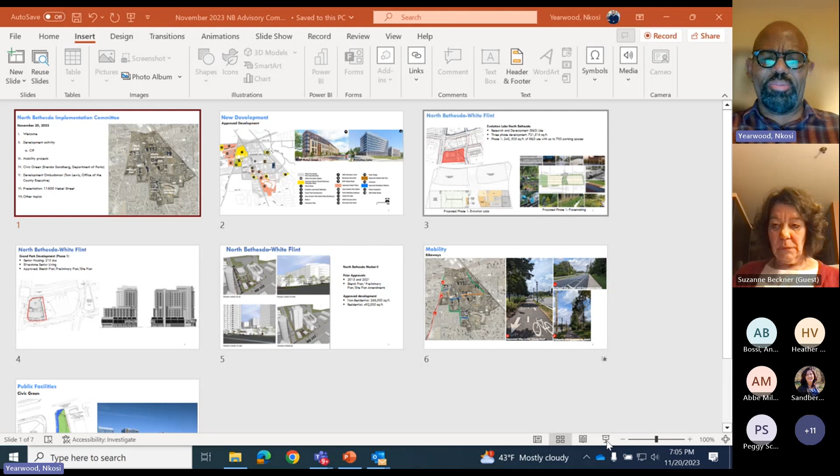I'll start with some development updates, things that have either been approved or are coming. In terms of the meeting agenda, a little bit on mobility, the bikeway project, an update from Brenda Sandberg with the Parks Department, and hopefully Tom Lewis if he's on this call. Then we'll wrap up with a presentation on a proposed project on Nebel.

So again, thanks everyone for joining. I'm going to get going here in terms of development - things the board has approved either prior to the summer break or since.

What's been approved - we anticipate construction beginning in '24 for number 9 on this map, which is MHP Nebel, a 162 unit multifamily development. Number 2 is Evolution Labs, which I have a couple more slides on - we talked about it before, you've seen a presentation in the past.

Construction should be starting next year for Grand Park Phase 1. Number 15 on this slide is Rose Village - we should be receiving, maybe before Christmas, a new plan from that developer/property owner, Wilco. Richard Cohen is the leader of that company, and it should be coming in under a compressed timeline given its focus on affordable housing. It has not yet been submitted officially to the department, but we know it's likely coming before Christmas.

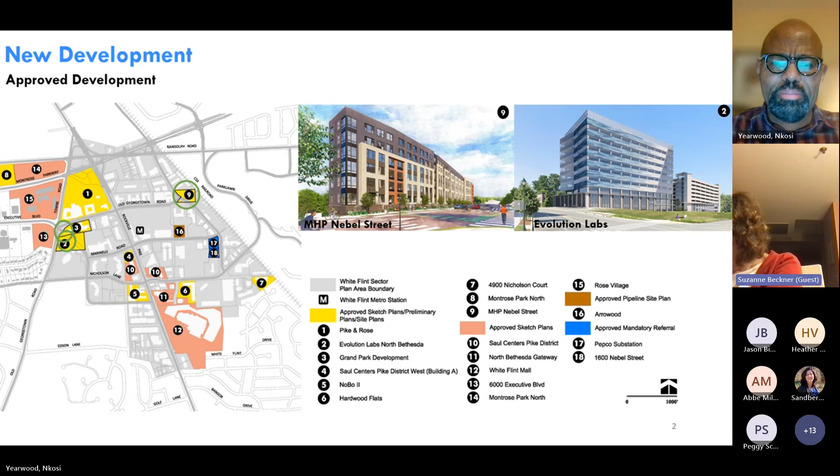So, does anyone have a question? When I finish this wrap up, you could either raise your hand or just unmute yourself.

This is Evolution Labs - a 3-phase project. First phase approval was granted by the board, but it has not yet gotten a staging allocation request. The staging allocation request is the final approval we grant for new development. Once that comes in, we'll really know the property owner/developer wants to move forward with building something. We have that for MHP Nebel as well as for Grand Park Phase 1.

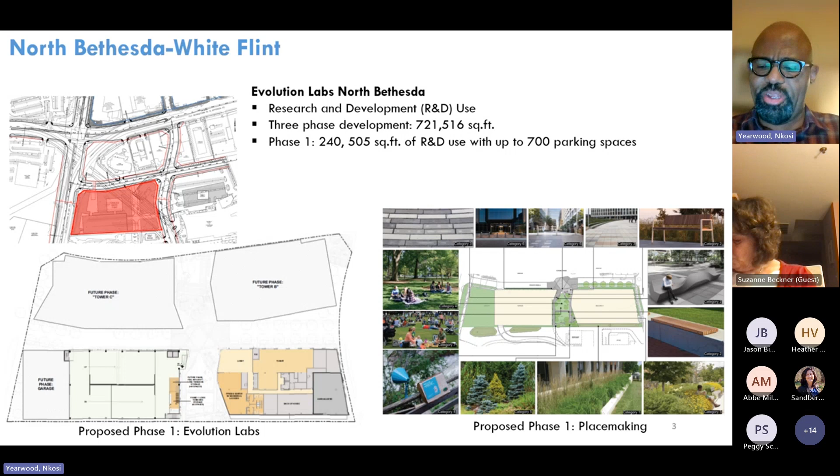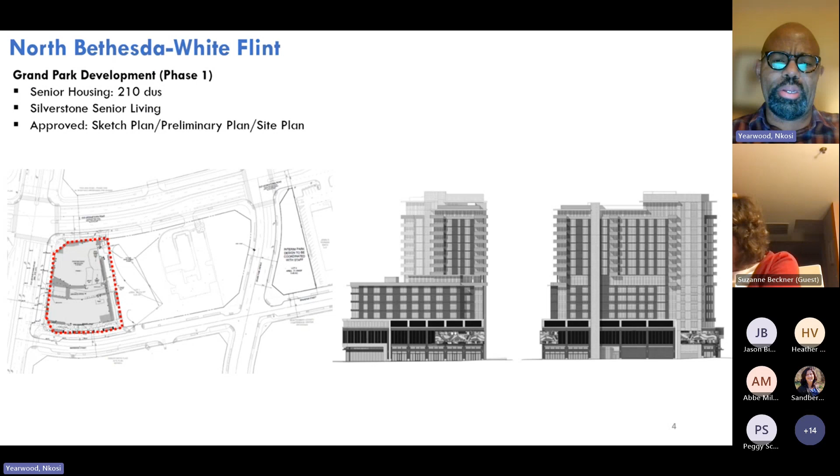This is Grand Park Phase 1 - senior living, Silverstone developer. Everything is being teed up for this to move forward. Wouldn't be surprised to see construction beginning in January '24. It's a senior high-rise development right across the street from Pike and Rose for orientation - this is where the VOB Saab dealership was for many years, right adjacent to Capital One, not too far from the conference center.

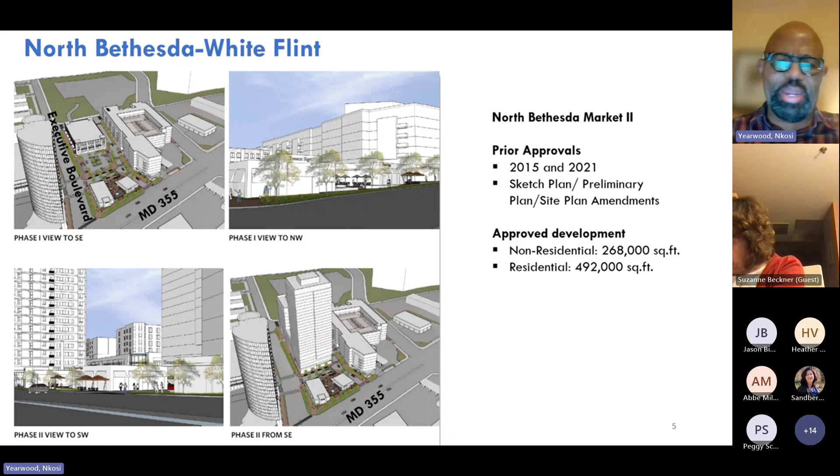Another one that's been approved prior, going around several cycles over several years, is North Bethesda Market 2, right near the Whole Foods, north of that, not including the gas station at 355 and Nicholson. It's a multi-phase project that will have multifamily, some retail, and eventually may build over the existing office on Woodglen with a China garden on the ground floor, for orientation purposes. We'll see if that gets going next year.

Switching a bit to mobility projects - over the last calendar year, a variety of projects have been implemented, some by the state, including the buffered bike lanes on Old Georgetown Road as part of the western workaround, the side path near Wall Local Park, and the protected bike lane along Towne Road fronting Pike and Rose. The next bikeway improvement should be up and running next year, maybe first quarter, a project that's been delayed for several months, probably more than a year - running close to 2 years by now - the Marinelli Road Bikeway project between Nebel and 355.

Once that's in place, another portion of the bikeway network will be implemented within the planned area. And then another important - let me just pause on this and switch topics for one second.

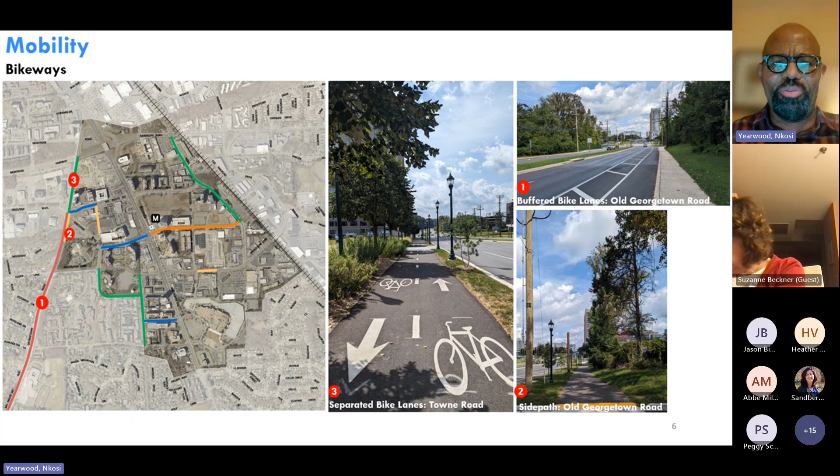Another facility we anticipate, not a bikeway facility but another public facility, is the fire station and some housing project associated with that - that's in the works. They're probably going to get a little more daylight in '24. We have a meeting coming up on planning staff calendars regarding that - not the fire station, but the housing component associated with it. This group will probably get more public-facing information on that next year.

This is my pivot to Brenda from the Parks Department. A couple weeks ago, the planning board authorized the purchase of the Jemal property on Old Georgetown Road, right across the street from Pike and Rose. It's part of the Grand Park development - we were able to get about half an acre from that developer, shown here on this slide as the green dot. The Parks Department went ahead and purchased that property after multiple negotiations with the property owner.

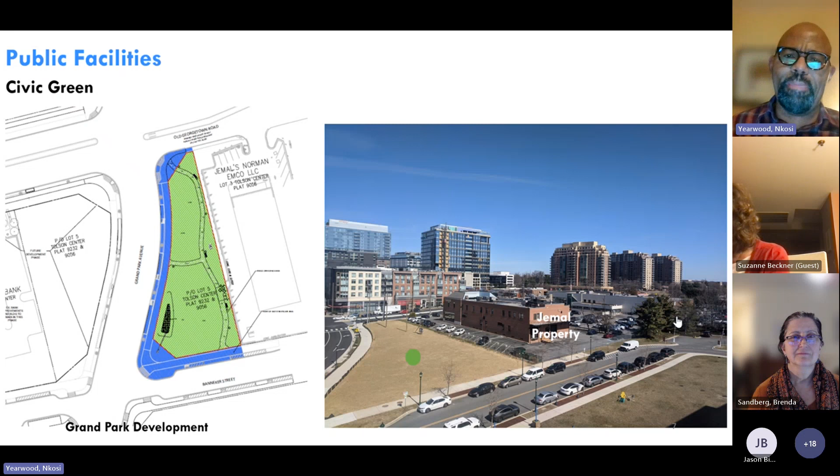So I'll stop talking now and ask if you have any questions on anything I've presented so far, and then ask Brenda, if she's here, to go next. Is there any questions for me? I don't see any hands raised.

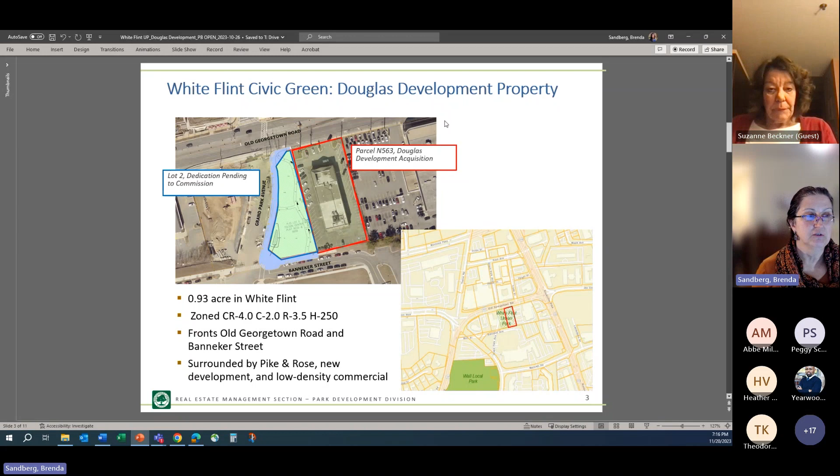You folks are very familiar with this area, so I'm sure you know it has Pike and Rose, new development, as well as some low density commercial that still exists in the area. Most of you probably know it's a 23,000 square foot building, built in 1969. It's in excellent condition, and it currently has 2 tenants: the piano store and a development company.

As we've mentioned in our public memo on the item, there's a very strong policy rationale, and we've been working to acquire this property for over 2 years. The 2022 PROS, the Park Recreation and Open Space Plan, is done every 5 years to meet state requirements, and outlines all parks policy and what we're doing and why. Then Thrive Montgomery focuses on active parks and open spaces for growing dense communities such as your community, the White Flint / North Bethesda area.

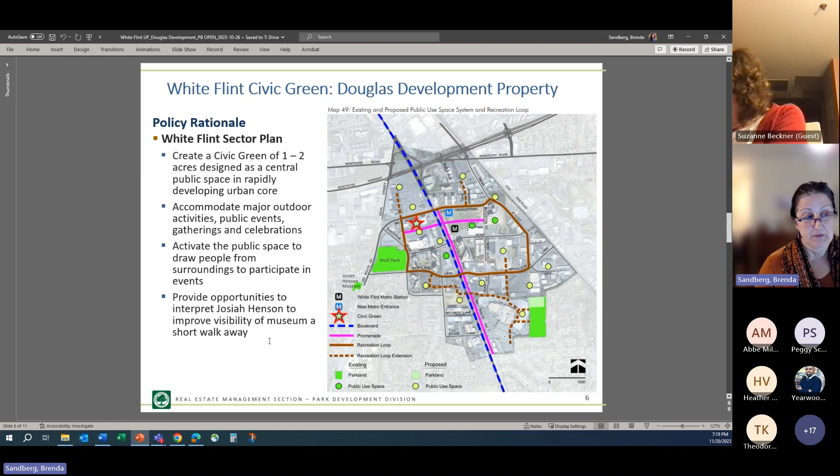As I mentioned, the vision is to create the civic green, 1 to 2 acres, to be a central public space. That is where we have acquired this property. The purpose of this park is to accommodate major outdoor activities, public events, gatherings, celebrations. The intent is to activate the public space, to draw people from the surrounding developments, both commercial and residential, to participate. Also, given its location pretty close, only a couple of blocks from Wall Park, which is another block from the Josiah Henson Museum, we think this is a great opportunity in this park to at least have some interpretation of Josiah Henson to help improve visibility of the museum just a short block away.

Again, you are familiar with what is going to happen here. What we negotiated with the developer, and is being fine-tuned as we speak through the park construction permit, is for the developer to build phase 1 of the Grand Park project to build an interim condition park that is designed so that along the edges here, it will easily integrate with the Douglas development property. The amenities for that interim condition will be open grass, paths, benches. So there will be a public open space that people can use until we get through the periods of time we'll have to get through to get to a full 1.5 acre park.

So we do not have a detailed park concept. After several years of negotiations, we just came to agreement on the amount and the contract about a couple of months ago, so a full-blown concept plan has not yet happened. There hasn't been time for that. But I'll mention when public outreach will start to get public input in the next slide.

Typically, the signature amenity for one of our civic greens is a large green lawn that can serve all sorts of purposes. It might have a stage, it might not. The goal is to have an abundance of seating, a mix of sun and shade, interactive and educational elements, public art, and amenities to support everyday use. So if somebody wants to get food to go from one of the restaurants across the street, they have a nice green place where they can throw down a blanket and have a picnic, toss a frisbee, do whatever they want. But it can also host really big public events that will help bring the community together.

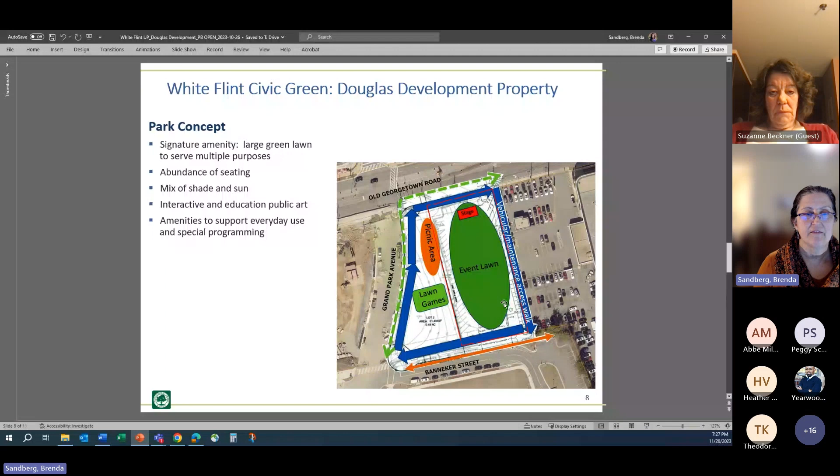Anyway, the planning board resolution isn't relevant here. I'll go back to the graphic, or I can just stop sharing the screen if everyone's familiar with the site, and I'm open for any questions.

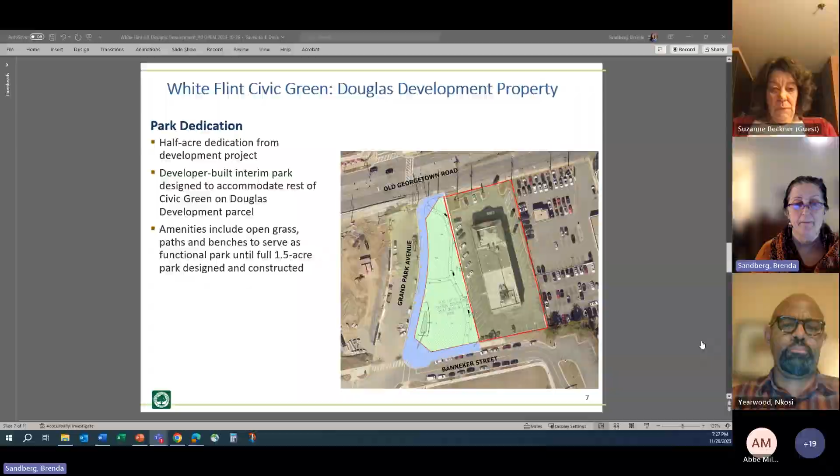Good evening, thank you for your presentation, Brenda, it was great. I have a question about something you mentioned regarding stormwater management at the site, and I was wondering how that is going to be implemented, integrated, and what the timeline is for something like that.

Well, stormwater—any project we build has to have stormwater management to meet the impervious surface runoff from whatever we're building. For instance, when I mentioned it, it was relevant to Lot 2, the piece of land being built as the interim park, which is almost half an acre.

There's a little area in that diagram—again, that was from an early site plan—there was a small area that was going to treat stormwater, I believe from the sidewalks, not from the road. It's not the park parcel's job to treat the storm management overall, but I believe it would treat some of the runoff from the sidewalks and side paths, etc.

In parks, there was a huge focus on doing bioretention and all sorts of other quality, more natural looking, as well as more natural functioning stormwater management. So it's not just channelizing it and running it off, it's integrating the stormwater management design into a park, so it feels green and attractive, not an ugly ditch. There's a huge amount of effort that goes into that.

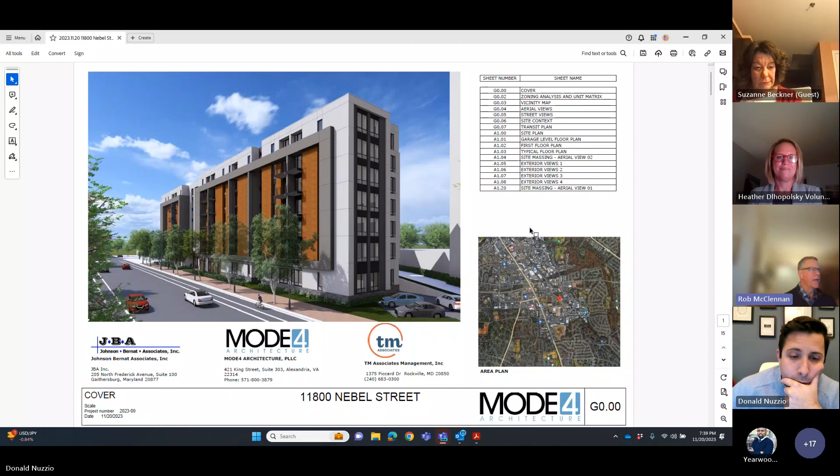We've given away the reveal here. Next slide. This is just a quick overview of the site. Next slide.

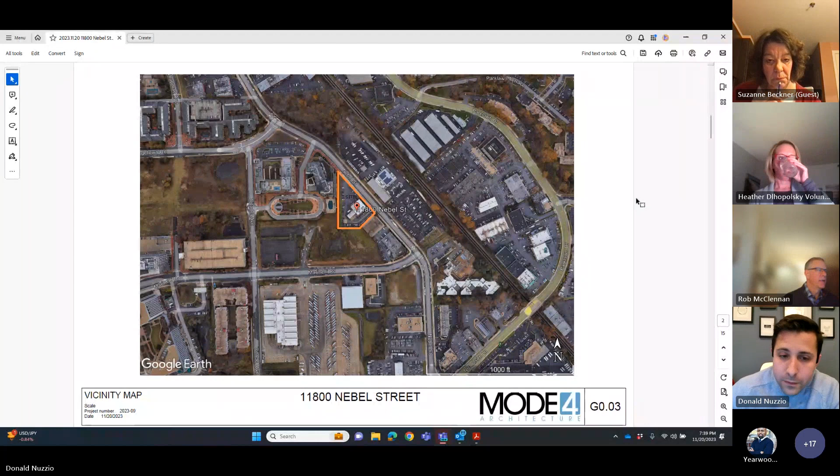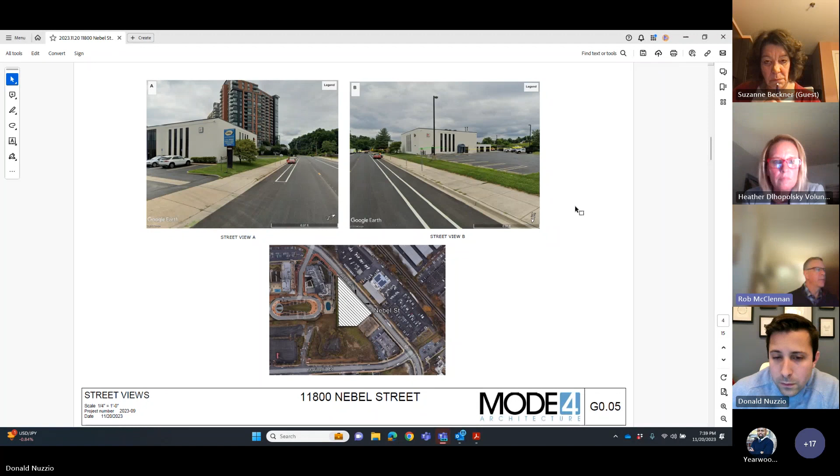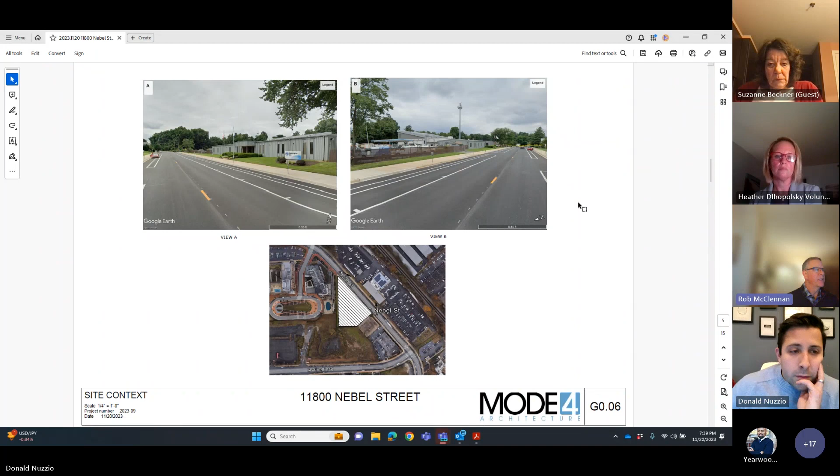Some aerial views as well, I think you're all familiar with the site. Next slide, Don. Some street views showing the existing building and the recent residential tower in the distance. This is looking north on Nebel Street, and looking across the street at the Washington Gas facility that's directly across from our site. Next slide.

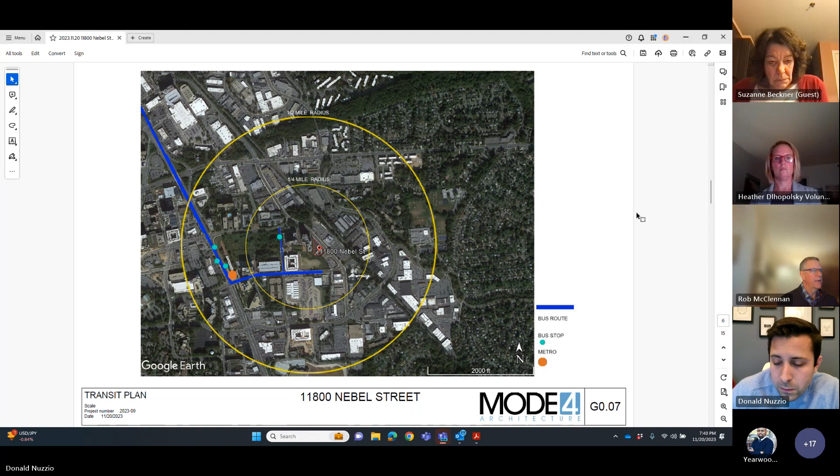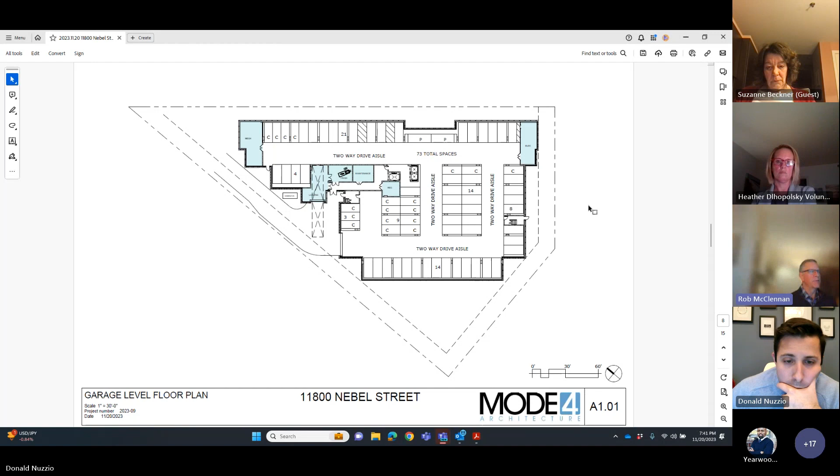Our ground floor is a mixture of amenity spaces and residential units, with 14 residential units on this floor. The amenities include a generous lobby, leasing office, a 750 square foot community room with an associated show kitchen, and bike storage leading directly out to Nebel Street to promote bike use.

There's also a raised area. You come into the lobby at ground level, then there's a raised area about 4 feet up containing a business center, what we call the living room—a lounge area for residents—and a fitness area.

The lounge area opens directly onto an amenity terrace above our garage, which connects to a triangular piece of land at the rear of the site. We'd program that with a tot lot and barbecue pit. We haven't finalized the landscape detail, but it's an amenity connecting inside and outside spaces.

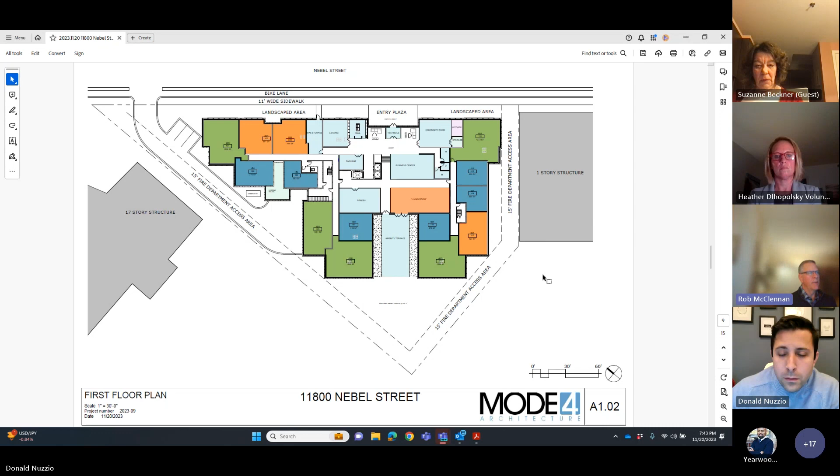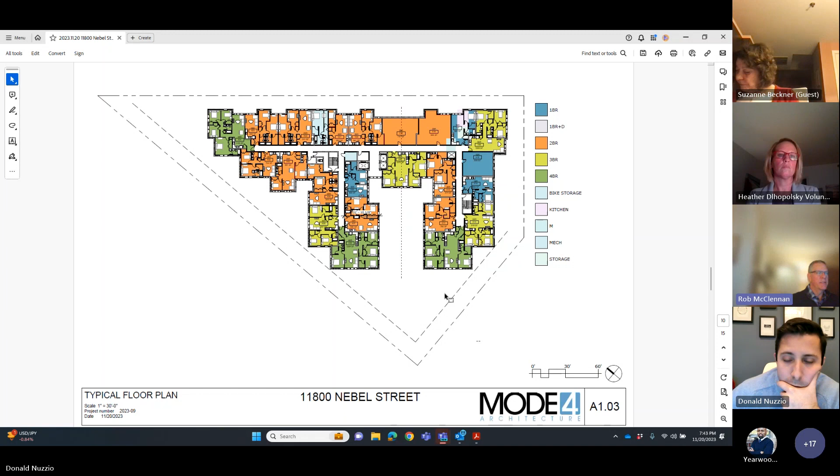This is a typical floor plan for floors 2 through 7, with 23 units per floor. We've color coded the units: a mix of 1, 2, 3, and 4 bedrooms. 20% are 1 bedroom, 49% are 2 bedroom, 15% are 3 bedroom, and 14% are 4 bedrooms—so there are a lot of family style units, especially the 3 and 4 bedrooms.

This is an overview image showing the building in relation to its context—you can see the 17-story building to the right, and our 7-story building in the foreground along Nebel Street.

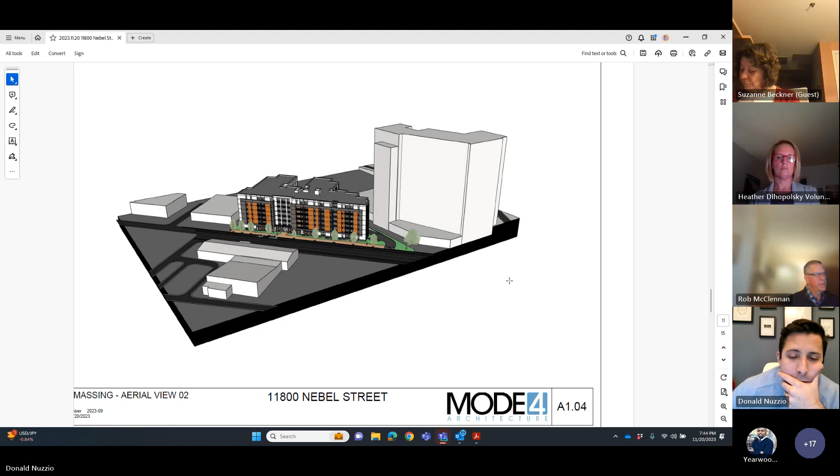These are some preliminary renderings. As mentioned, we're still in a concept phase, working through some color iterations, but the general idea is a 7-story building.

The ground floor would contain amenity spaces with storefront systems that activate Nebel Street. The units themselves would sit about 5 feet above the sidewalk to give privacy so people aren't looking directly into the unit, while still helping to activate the street.

Within the building, we're proposing a frame system, shown in gray, rising from the 2nd floor to the 6th floor, containing a panelized system with inset balconies and other windows. The 7th floor would be an attic story that cascades down at the ends of the building and at the entry.

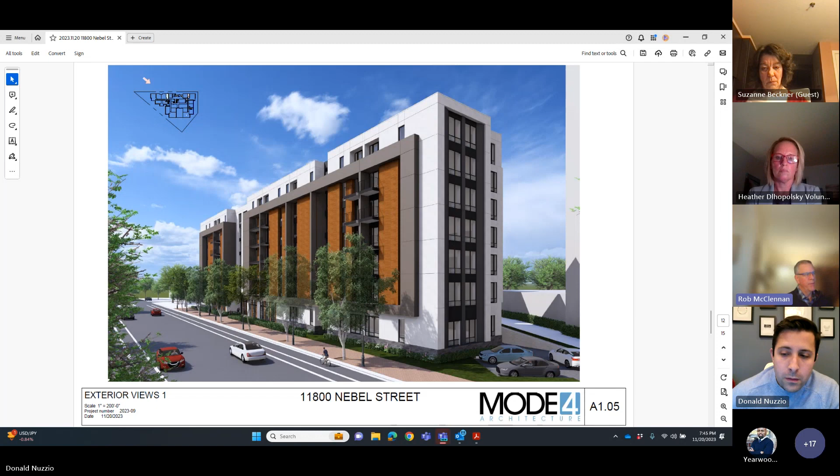This is the entry, which we're still working through. Based on comments from county staff, we plan to enlarge the paving area here and add benches for residents and guests to stop and wait for an Uber or similar. This would be the entry system to the building, and we do propose a canopy.

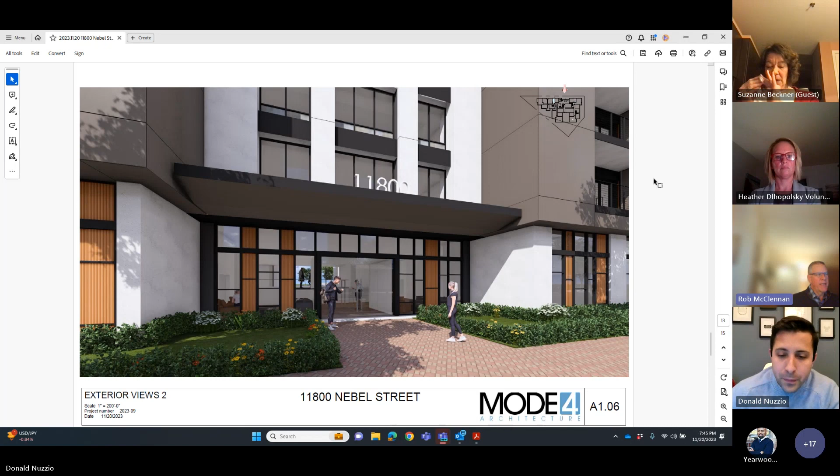Overall this is more looking toward the north. You can see the entry bay is recessed to allow for more landscaping in front of it. And then we create these 3 vertical window bays that add vertical accents to the entrance.

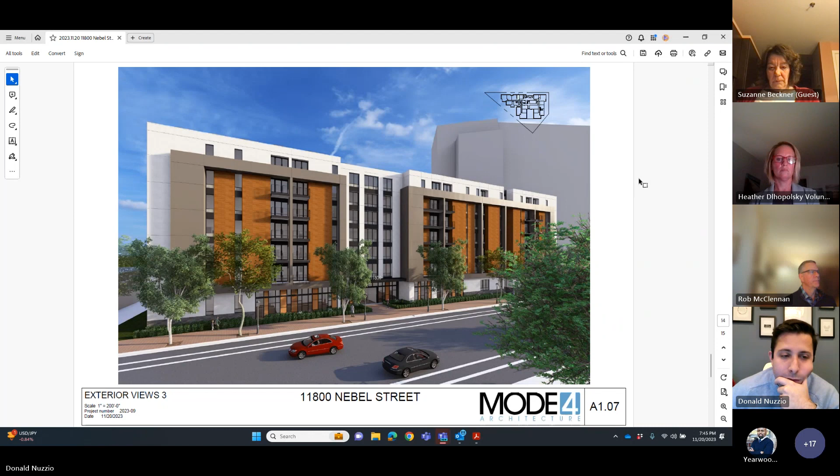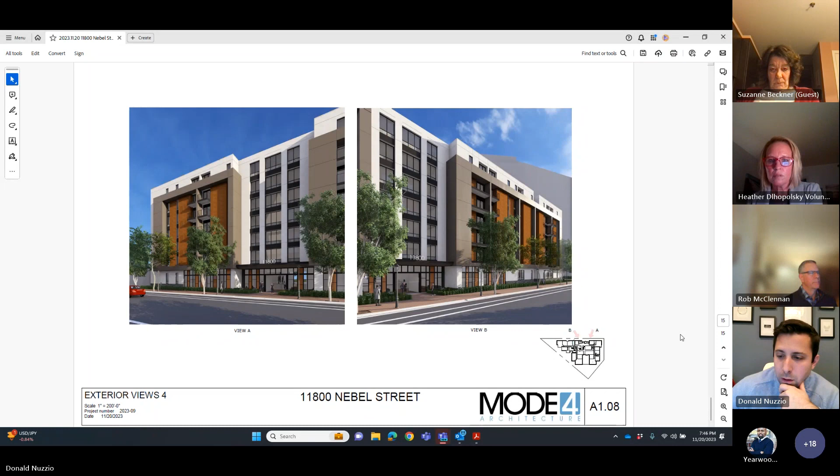And just some other images of the building showing the overall composition. So I think that's it, that's all we have for tonight. I'm available to answer questions, as well as Heather and Don.

And I think we didn't actually mention the total unit count—it's 7 floors, and we're proposing up to 152 multifamily residential units. Maybe Don, do you want to talk about the goals of the development, the affordability and what we're looking to do here for the housing community?

Sure, thanks Rob, thanks Heather. So this 152 unit community represents TM Associates' investment of over $80 million into the North Bethesda community, which will cover households across the 30 to 80% AMI income band. We truly believe this is an attainable, integrated housing community and new construction opportunity that can help a lot of the commuter base, commuting not only throughout Rockville but also into the district, Arlington, and similar areas given the close vicinity to the metro.

Adam, are there other more top-level general comments you want to bring up on this call? No, not at this time. Just love to receive some feedback from the group if anyone has any questions for us.